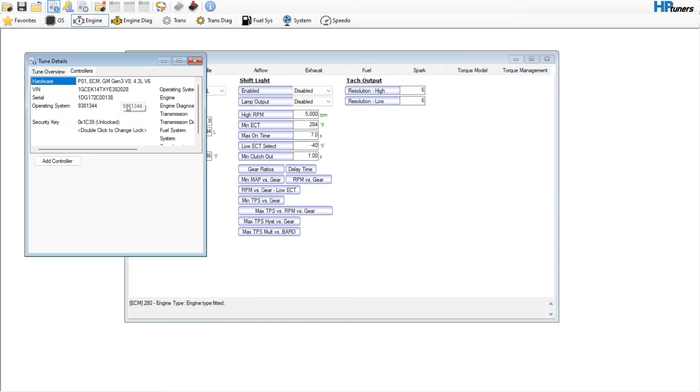So I'm just gonna go to my stock tune repository, and I'm gonna go with this 2005 5.3 stock file. This is gonna be pretty common with what a lot of people are still playing with, which I think is pretty relevant. If we go up here, it'll show us the operating system. It's P01, so I don't believe it's going to be flex fuel capable, which is fine. There's still a lot of great combinations out there that are Gen 3 that are really basic that still make really good power.

So the combination that we're going to be dealing with today is we're going to assume that you are doing a bigger than stock motor. And you're going to be doing a bigger camshaft and a bigger throttle body, and it's going to be catless, so it's going to be for off-road use only, of course. And then we're also going to add some electric fans, which is pretty common. So like the later 05, 6, 7 maybe, you could get the electric fans and the relays, and you just had to pin it into the ECM.

And I'll tell you the injector part numbers that we're going to use, because we're going to do an upgrade to a Gen 4 injector that a lot of people like to do. We're going to assume that we're going to be using a 408 cubic inch motor. This could be applied to anything, though. Like my Yukon that you've seen on my channel is a 5.7. You could be using a 6.0, a 6.2, a 383, a 388, just whatever it is that you'd like to use.

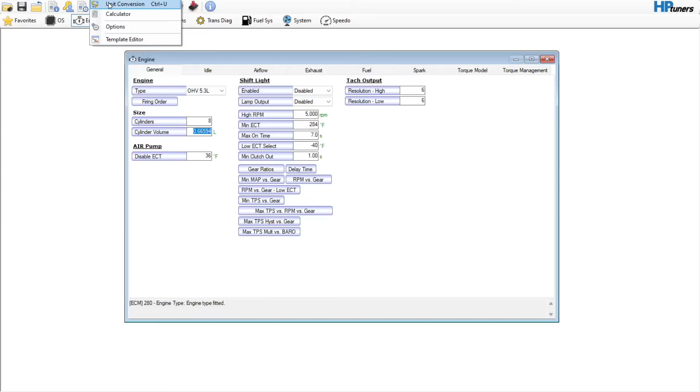So cylinder volume, this is going to be a big one. We need to make sure that we update this for the cubic inches that we are going to be using. So we're going to go up here to tools, and go to unit conversion. Down here under volume, cubic inches, we're going to say 408. That's going to be a 6.6 liter motor. From there we're going to go back to tools and go to the calculator, and we're going to do 6.6 divided by 8, and that's going to equal 0.825.

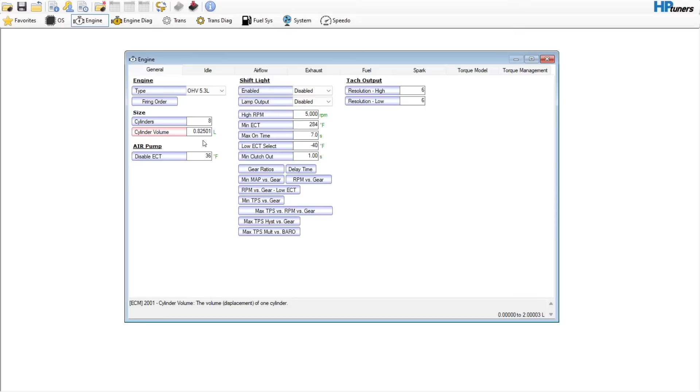Okay, so we're going to go 0.825. That is going to update the tune file for the correct cubic inch displacement that the motor is going to have. So we can check that off the list. Take my little pen here, check that off of my notes. That's going to be pretty important, have to have that. Next, we're going to go under idle. And by the way, over here in general, all this stuff, you don't need to mess with any of this. Firing order, the air pump, you don't need to mess with any of that. Just cylinder volume. That's it.

We're going to go to idle. This is a big one. You have the RPM and the airflow tab. This right here, the adaptive idle, this PID system, you do not need to mess with this. Some people do. I personally don't. I haven't really found the need for it yet. But this base set point, this is going to be our base idle.

So we're going to assume that we are using a pretty popular camshaft here, the BTR Gen 3 and 4 Stage 4 V2 truck cam. You could apply this to one of the Texas Speed ones, the Torquer 2, the Torquer 4, the TSP 228, which is what's in my truck. Truck Norris and Chupacabra are going to be a little bit smaller than this.

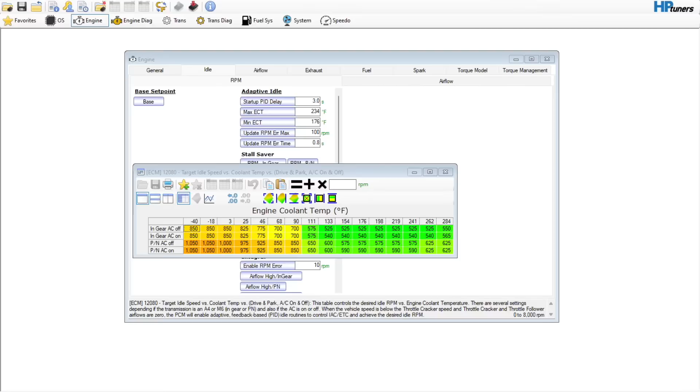You should most definitely do a converter. At least a 2800 or better, preferably more, like a 3200. If you're going to be in there and spend the money, you might as well do it. This is a pretty popular camshaft, especially amongst the 5.3s, and this is honestly too big for the 5.3s in my opinion. But we can go here.

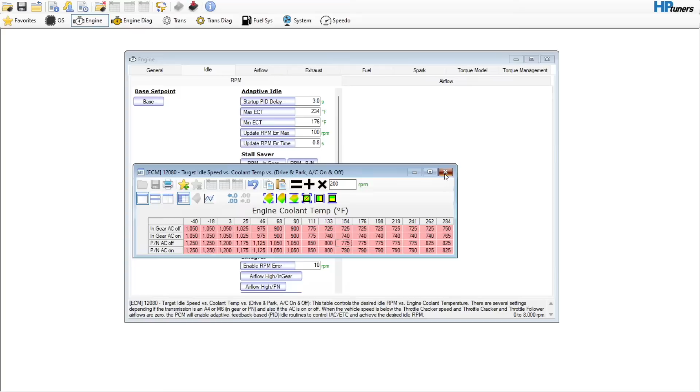I'm going to probably go and just command at temperature 219. We're seeing like 575, 540. We're just going to say 200 more. So we're going to go 200 plus, and we're going to start there. Especially on like a new build, you're going to want to just get the thing up and running. Okay, so we're going to be commanding more idle. We're also going to need more airflow.

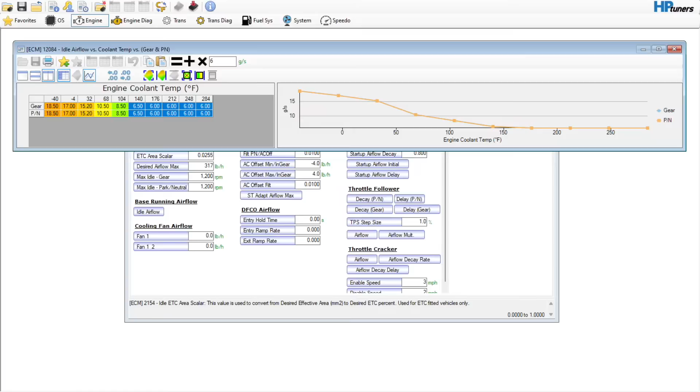Okay, so I'm going to come under here under the airflow tab. Base running airflow. This is going to be way too little airflow though. Okay, so what I'm probably going to do is I'm going to come here around 140, and I know that I need to be somewhere like in the 11 or the 12. So I'm probably just going to go in here and I'm going to add 6, something like this. And then I might do a left to right interpolation, something like that. That probably would be okay for right now.

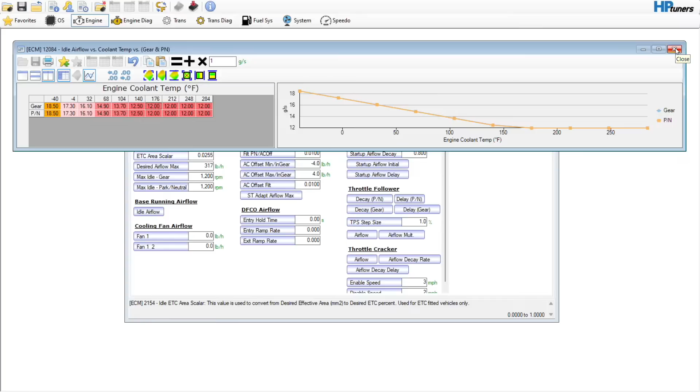You might find that when you put it in park or neutral, you may have to go in and add like 1 gram of air. Okay. Well, you can notice here we're in grams per second. You can pick the units that you want to work in. I like grams per second. Half a gram of air is a pretty good bit, as opposed to pounds per hour. So that's just something to keep in mind. But definitely with the idle and this table, you're going to want to do that. That's going to be pretty important.

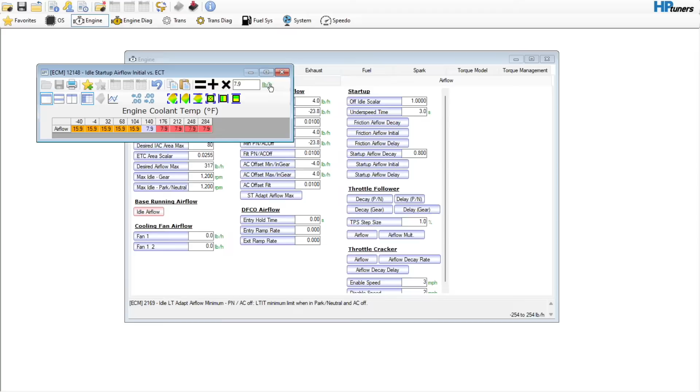Okay. The rest of this, all of this, you can pretty much leave alone. Same thing with here. Over here, the startup airflow, we may want to go in here and just set this all to like 7.9, and that's in pounds per hour. So it's not nearly as much as grams per second, but you would definitely want to add a little bit more here. It's going to need it on fire up, so that's just something to consider.

Let's see. Sometimes friction airflow, maybe you need a little bit more. For right now, probably not. We'll just let it kind of see what it's going to do. We're also going to assume throttle follower. Don't need to touch that.

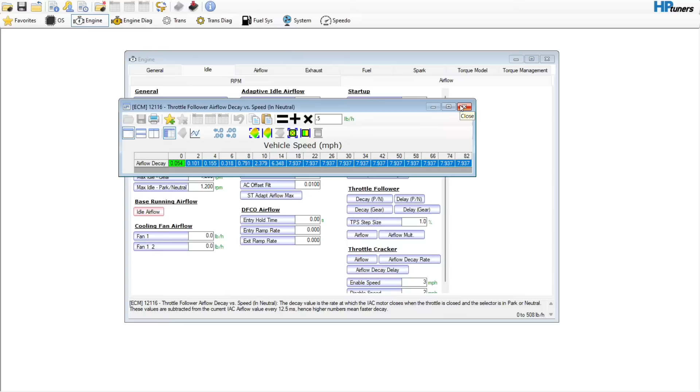You could go here to the decay, and if it's decaying too fast or too slow, if you hover over it, you notice where it says down here, higher numbers mean faster decay. You could cut this in half if it's decaying too fast and it's stalling. You could go in here and just hit 0.5 and then hit multiply. You could do something like that if it's decaying too fast. But for right now, we're assuming we have a brand new motor. We're just trying to get this deal up and running.

We're going to also assume that we have a 90 millimeter throttle body. So whether you are using a rect port head with a rect port truck intake manifold and a 4-bolt 90 millimeter throttle body, or you're using a cathedral port head and intake manifold and you're just adapting the throttle body, what you would want to do here is take this number, 0.0255. We're going to go over to tools and, actually, no, we're going to leave this alone. 78 millimeter stock Gen 3 throttle body to a 90 millimeter is not very big, so we're actually not going to touch that.

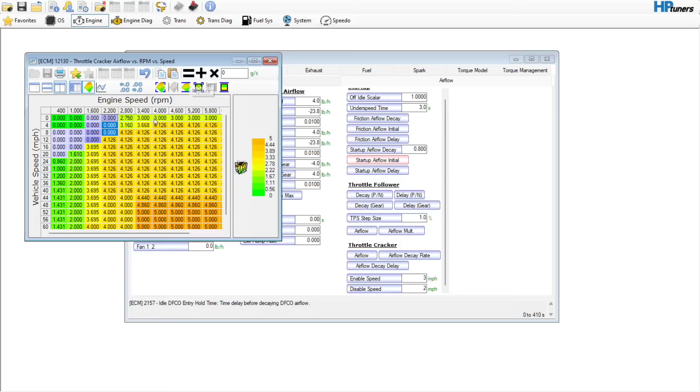Throttle cracker and follower, you can go ahead and update this. I like to go in here and do something like this. That way we don't have any hanging idle, and just kind of cascade this with 0 so that it soft lands kind of deal. You don't have to do this. You can. This table usually throws people for a fit. I don't recommend disabling it, and what I mean by that is coming down here and setting these both to like 256. I don't recommend that. I would say just leaving them at 3 is fine.

What I might do is set this to like 9. Oops, sorry. Wrong order. 9. There we go. You can see here the enable speed, throttle cracker enable speed. Above the speed, the throttle cracker is enabled and the adaptive idle routines are immediately disabled. That means that everything above 9 miles an hour, throttle cracker is going to handle, and everything below 9 miles an hour, the adaptive idle is going to handle, which the adaptive idle does pretty well, so you should be okay there.

We're going to go over here to airflow. Primary and secondary. Has this already been? I haven't touched this. Okay. So what you can do here, just to get it running, you can leave it in its blended mode. There's your mass airflow frequency table. You can leave this like it is.

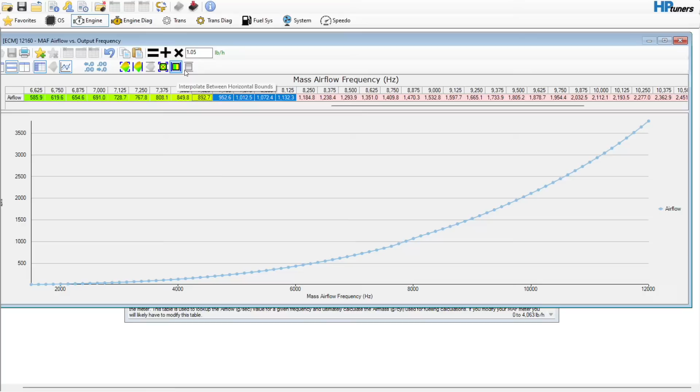If you want to go in here at 8,000 and you can add, I don't know, 1.07 or 1.05, which is what a lot of people will tell you to do to get it to the tuning shop. You can do that. Smooth that out. That way it's nice and smooth. That way it gives you a little bit more fuel up top. It's up to you. The VE table, wouldn't touch it. Just leave it alone. We can talk later about mass airflow tuning versus speed density.

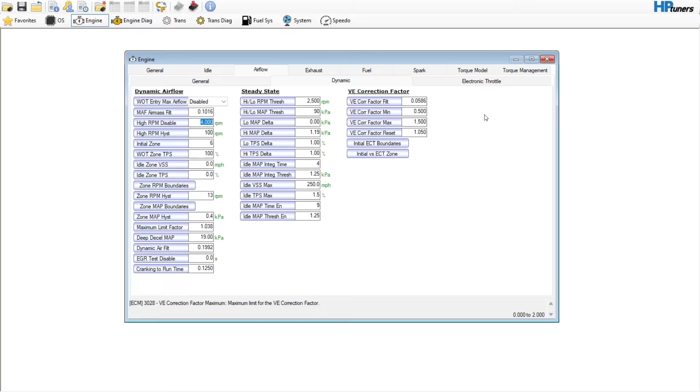For right now, you can see that under the airflow dynamic tab that the high RPM disable is 4,000. That means technically anything above 4,000 is on the mass airflow table. Everything below is speed density, but really anything that's transient. So when you stand on the throttle, when you shut it down, so on and so forth. But for right now, we're just gonna leave this like it is, okay? And then we have the electronic throttle. We're not gonna touch that. Exhaust, don't need to touch that.

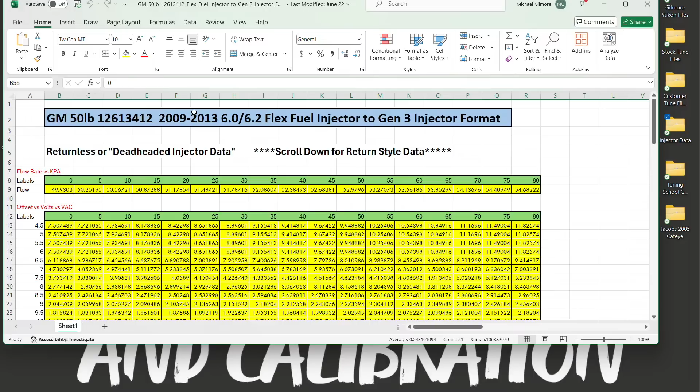Fuel, if we see here, 0 kPa, we have basically a 24-pound injector. We're going to update this. So we're going to go to our injector data tab, and we want to use the popular 12613412 50-pound flex injector. You can get this online. Some people sell it, or you can also email me or let me know and I can get it for you. This is what it came in. So if you had an HPTuners stock file, this is what you would use.

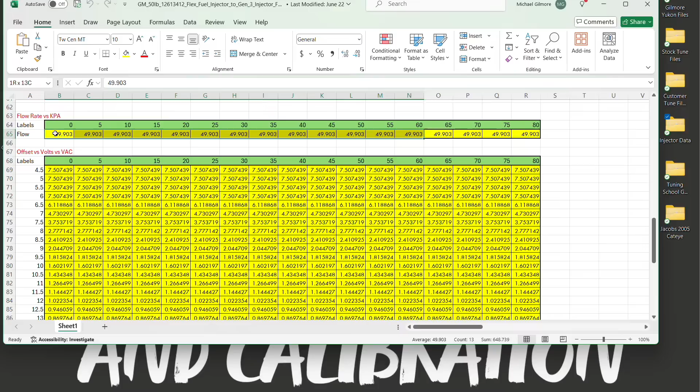There's two different types you got here. You've got the top, which is the returnless or the deadheaded system, okay? And then you've got what a lot of us have, which is the return style, okay? And so this is what we would use. And so here's your flow rate versus kPa. So we want to go in here and copy this. Copy, go back here, flow rate versus kPa. Go in here and hit paste. Go back to our spreadsheet, and make sure the axes are going to be correct. There's 0 to 80, and then 4.5 to 18 or 18.5, whatever it is.

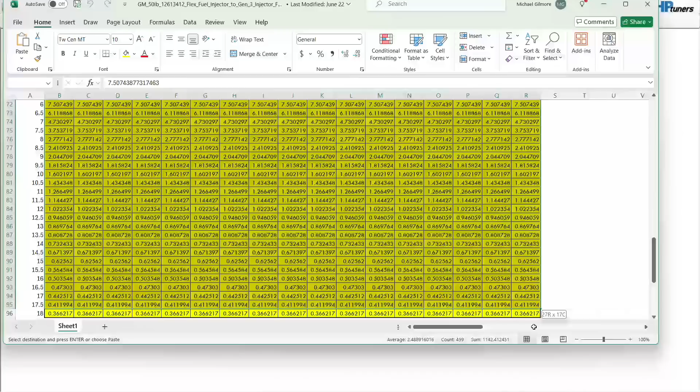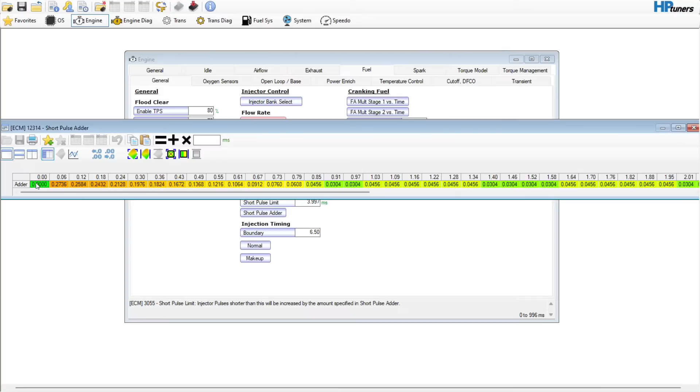This is the offset versus volts versus vacuum. So we're going to take this, and we're going to hit copy. Offset versus volts versus vacuum. Right click, we're going to hit paste. There's that. What's the next table? Short pulse limit is 3.997, which it already is. And then we have the short pulse adder. Let's go over here. This goes all the way out to 4. Right click. This is the short pulse adder, and make sure the axes are all the same. Go over here and hit paste. It's going to change that.

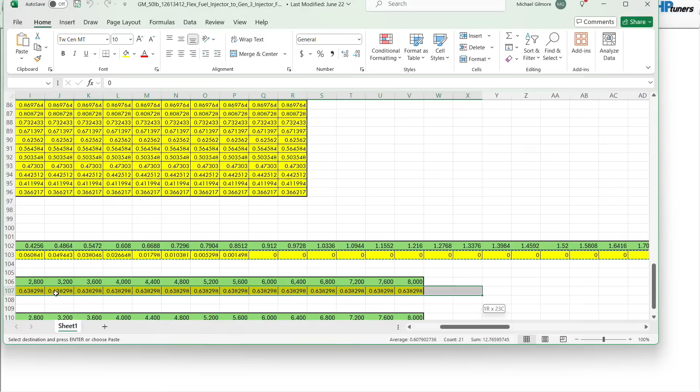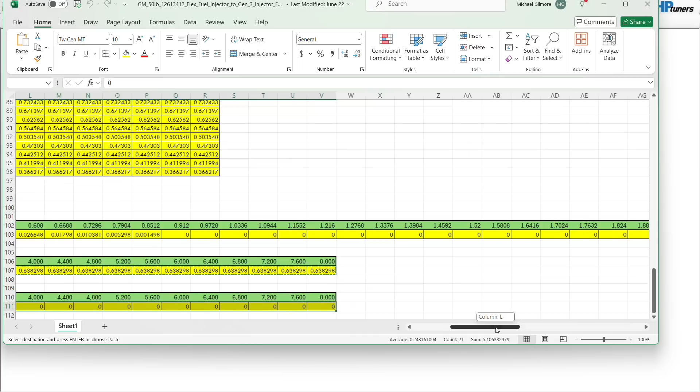This part is minimum injector pulse width. This is incredibly important. If you mess this part up, you're going to have a vehicle that does not run worth a flip. Minimum injector pulse. Go here to paste. Sets that up. And then there's one more, which is the default injector pulse. And we'll copy this. Go back. Here we go. Default injector pulse. Paste. There you go.

So we are set up for the 1261-3412 flex injectors, 50-pound flex injectors there again. This is what they came out of. If you want this, just let me know and I can get it to you.

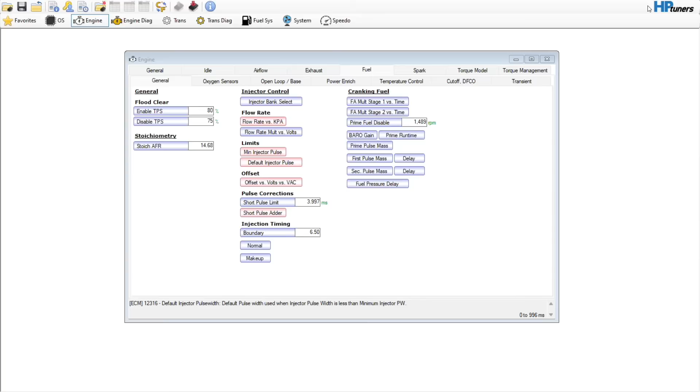Okay. So in the fuel general tab, we're all good there. Oxygen sensors, we can go in here to long-term fuel trims. We can disable these, select disable, set our min to 400, set our max to 1, and set the min kPa to 255. That will cancel them out.

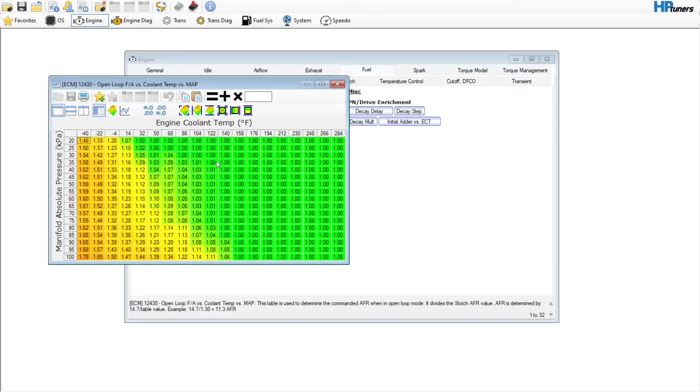Open loop base, you want to make sure short-term fuel trim open loop is disabled. We don't need any data from the short-term fuel trims while we're in open loop. That's what the wideband sensor is for. EQ ratio, if you wanted to set everything at like 104 and above to 1, you could. We're not going to right now. There's just no need to.

Power enrich. We're going to say the minimum kPa is going to be 65. This is definitely way too high, so we're going to go in here to our throttle trigger, hit that to 60. Everything 4800 and above we can set to like 15, and then we can interpolate them over. That way, and we'll copy this, put this in the cold table. The cold table is the one that is referenced.

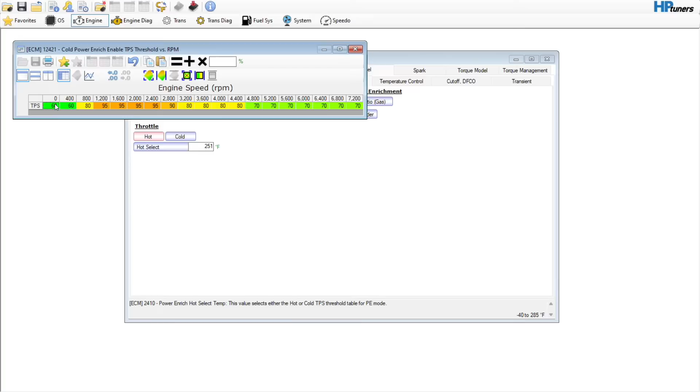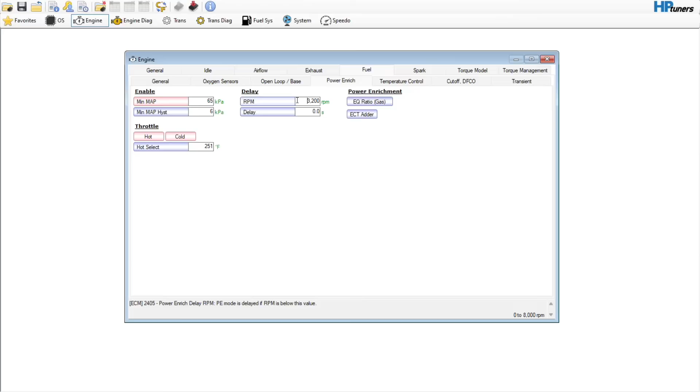Oops. Oh no, I didn't get it copied. Whoops. Try that again. Right click, copy, cold. There we go. That'll work. Yeah, you can see here the hot select's 251, so you're always going to be referencing the cold. Minimum RPM delay, we can set that to something like 1,000.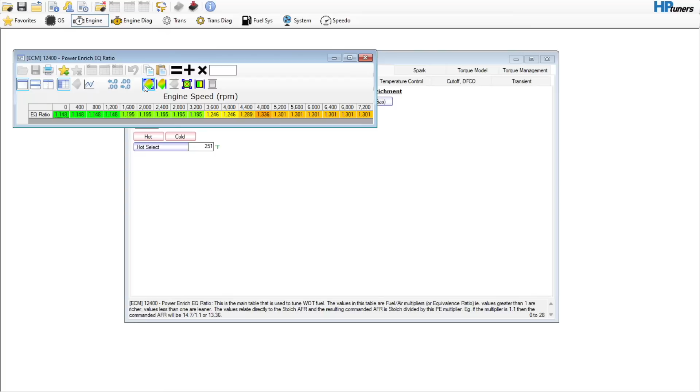EQ ratio gas, this is your wide open throttle fueling. Sorry, we want to command like a 12.5 at wide open throttle. So if we go 14.7 and we divide that by 12.5, 1.176 is where we want to be for our multiplier. We'll just set this whole table to 1.176. That way we're not shooting for a moving target.

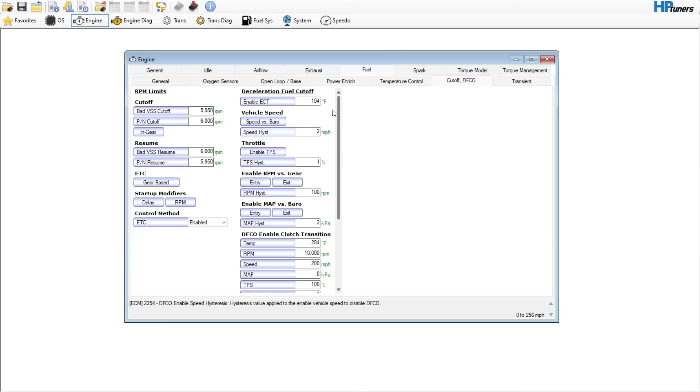So temperature control, we're catless, so we're going to disable this. Fuel decel cutoff, not going to turn that off. It's fine just like it is. The rev limiters, we're going to leave that like it is for right now. That's probably okay. We could bring it up some, but for this application, we'll probably be just fine.

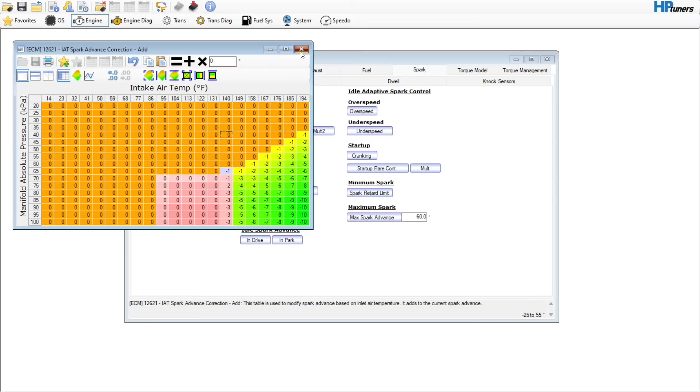Okay. And then if we go into the Spark Advance and we go to base, fuel base, we want to zero all this out. We want all of our values coming from our high octane table. If we go to the IAT base, I may do something like this, zero this guy out, and then 131 and above, we can interpolate. That way, if you're in the summer and you're sitting around, it's not going to get super hot and super crazy and try to pull a bunch of timing out.

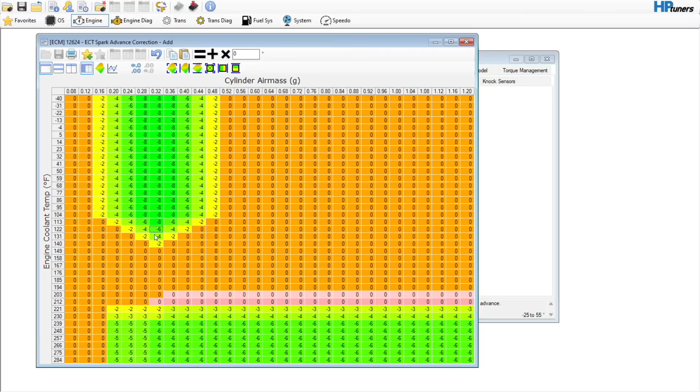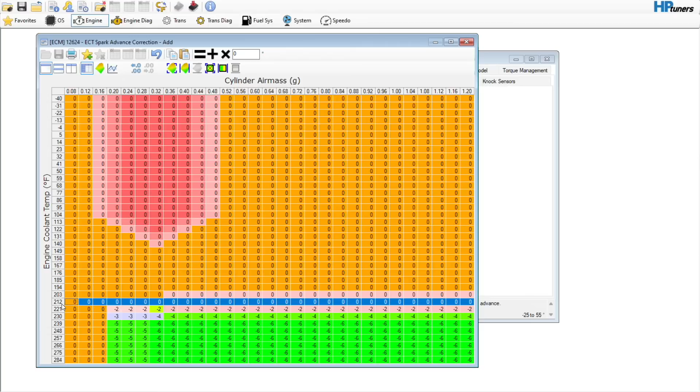Here, we have engine coolant temperature on this side and cylinder air mass on this side. So, engine coolant temperature, 212-ish is about running temperature. So, I want to go here and zero this out, and then we can take 212 and above and kind of do like a little interpolation there. We don't really need this. We can get rid of that. On some of the later model ones, like the P59 03 to 06 trucks, it might be inverted, so these axes would be different, but it's the same concept. So 212 is pretty much running temperature, so you don't really want to be pulling any timing there, but everything above that, you can start to yank some timing out of it.

EGR, we don't have that. So we should get rid of it. None of this other stuff is going to really matter. These in-drive and in-park tables, leave them like they are. This is enough timing for a cam like this. You should be just fine.

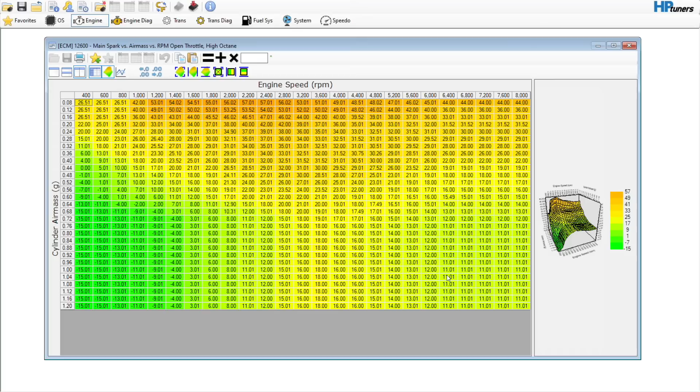High octane table, the stock modeling is going to be pretty good. So until you get a wideband sensor in it and you start getting your fueling lined out, this is going to be just fine. I wouldn't worry about this. These values aren't going to be overly aggressive. Even though we're commanding a little bit leaner mixture, they're probably still going to be just a little mild. So overspeed and underspeed tables, no need to do that. If you want a cam sound, get you a camshaft that does cam stuff.

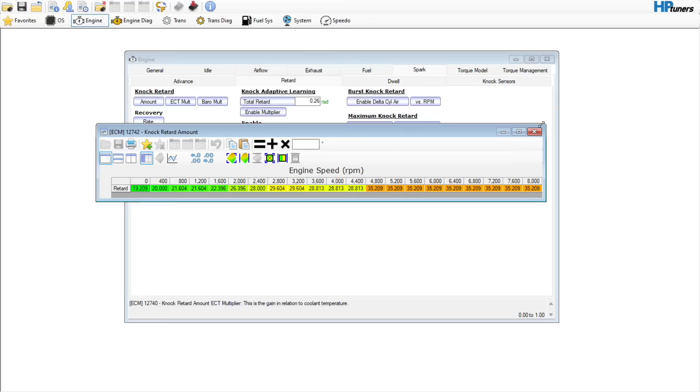Let's see. Spark retard, recovery, we might go in here and multiply this by like 2. That way, if you do get any knock, it recovers quickly. So we might do something like that. Burst knock. You'd have to log this, but probably just leave this alone for right now. I wouldn't really touch that. Knock sensors, I wouldn't mess with any of that. You're going to be just fine there.

Torque model or general, no need to mess with that. Torque loss, probably not going to mess with this. Maybe if you have a really big cam and the AC is struggling, you can mess with it, but I probably wouldn't.

Okay. RPM versus gear, this looks like it's already maxed out, which is good. This max torque, you can see down here at the bottom, 640 is the limit. We can just go ahead and change that. It's not going to hurt anything. TPS max, we're not going to use this as a drive-by cable. I'm not going to touch torque management stuff there.

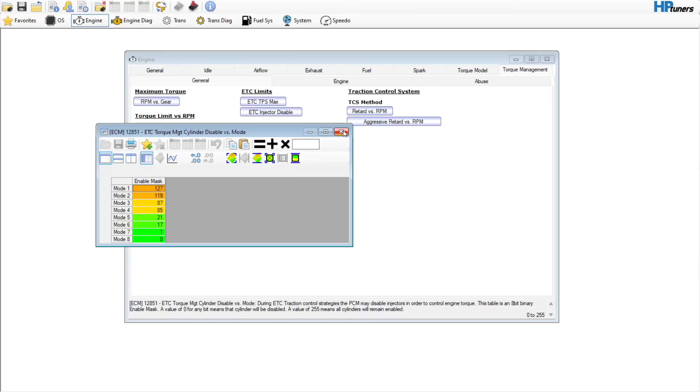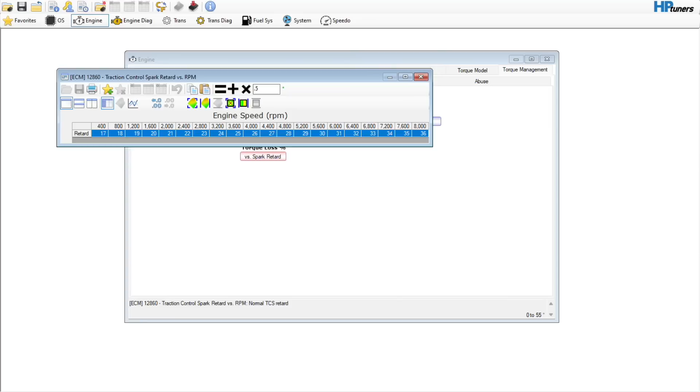This spark retard versus torque reduction, you could cut this in half if you wanted to. That way you can still drive in the rain. Same thing with the torque loss. You could cut this in half, and that would be okay. Traction control, there again, we can cut this in half. It's probably going to be just fine. It's not going to hurt anything. Most people just turn it off, I'll be honest with you.

Drivetrain abuse, probably set that to like 8,000. That way, you can see here, drivetrain abuse enable RPM. RPM must be greater than this to enable the drivetrain abuse calculations. So basically, everything under that, drivetrain abuse can't be enabled, which is just fine. And that's going to kind of take care of that part of it.

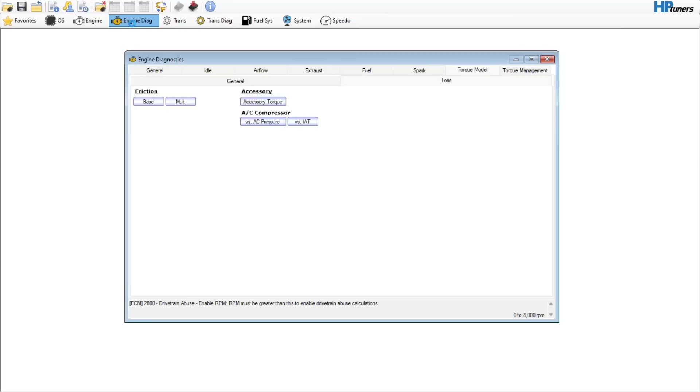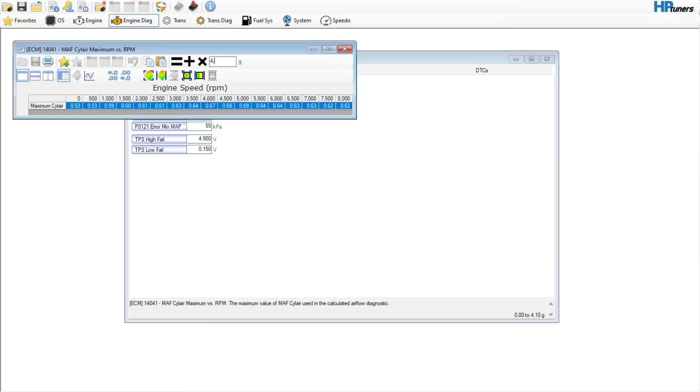Airflow. We're going to assume we're still using a mass airflow sensor. That'd probably be fine. We can go in here to the P1514 table and set this to like 4.10. It's a pretty standard number. Never going to reach that. Just wanting to make sure. Same thing with this MAF Cylair deal. Put that at like 4.10. It's going to be just fine.

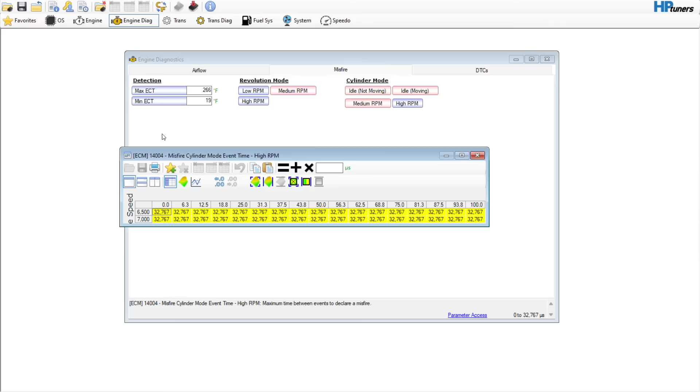Misfire with a cam, I wouldn't just set these all to like 32,767, but with a cam, you probably want to come in here and multiply these by like 2. That way, you're going to have probably some misfire counters because of the camshaft, but if you go in and multiply these by 2 and then maybe like a half at a time, you can still retain the misfire counter, which is okay. If you just set these values to their max, obviously this thing could be running like crap and it would never throw a check engine light.

DTCs, anything that is an O2 bank sensor 2, you would want to go in here and set this to no error reported. So anything that is sensor 2, okay? So I wouldn't uncheck them. I would just change them to no error reported. So you can go through and check these out. There's even a sensor 3, which hasn't even been used, so on and so forth.

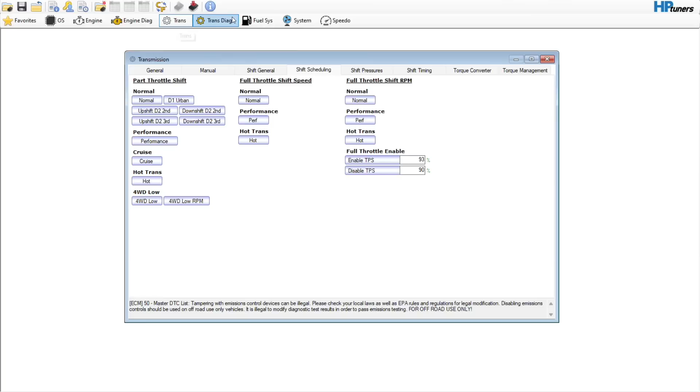So if we go over to trans, we're not really covering that right now. Trans diag, fuel system, no need to touch that. System, general, if it's a swap vehicle, you would want to set the VATS to none, and then do a write entire.

Fans, we're going to go ahead and say that we are using 2 fans, but these on and off switches are not very good. So we're going to go to open compare, and we want to go to like a manual, like a Vette. Okay, come over here and we can see the differences, and you could copy these all over if you wanted to. The on and off ECT is what I'm most concerned with. So I'm going to go over here and do something like this. And then same thing with the running condition. I'd probably do something like that. So that would be a good route to go, at least to get started.

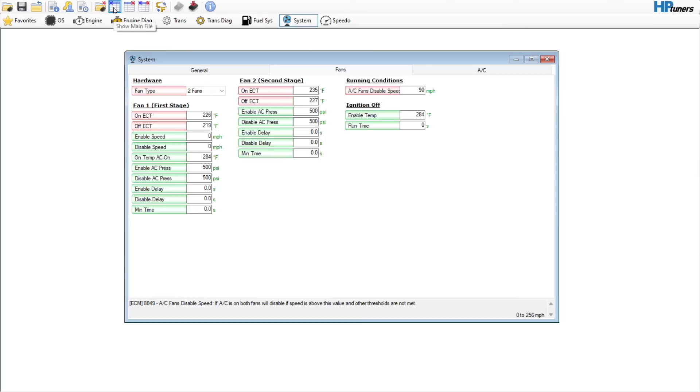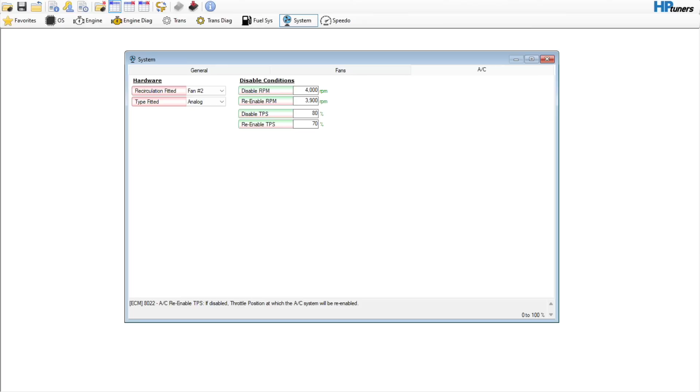Your speedo, we can do that in a different video, the tires and all that stuff. The limiter, you can let your speed limiter be 120, something like that. That'd probably be fine. Again, 120. So that's going to be kind of a good starting point for a big cam combination.